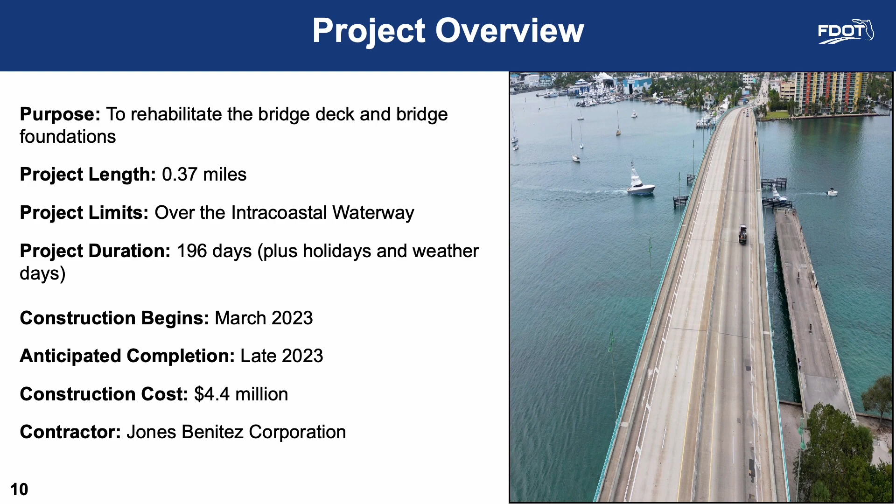Project Overview. Repairs will be made to the Blue Heron Boulevard Bridge over the Intracoastal Waterway. The project will begin in March 2023 and is anticipated to be completed in late 2023. The contractor building the project is Jones Benitez Corporation. The estimated cost of the project is $4.4 million.

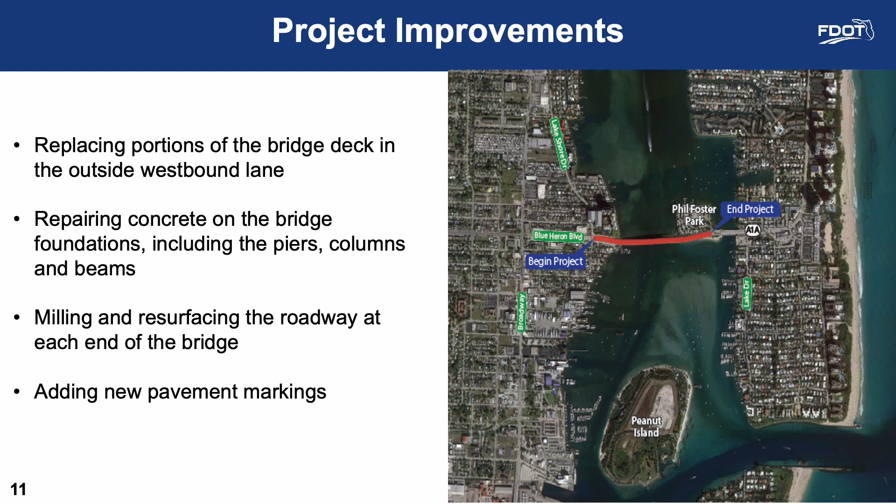Project Improvements. Project improvements consist of replacing portions of the bridge deck in the outside westbound lane, repairing concrete on the bridge foundations, including the piers, columns, and beams, painting concrete portions of the bridge, milling and resurfacing the roadway at each end of the bridge, and adding new pavement markings.

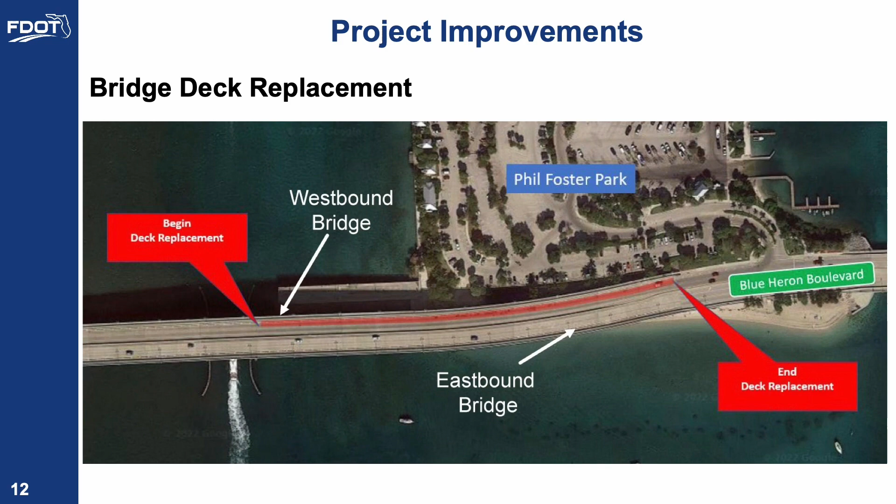The bridge deck replacement will occur between spans 10 through 19. During demolition of the existing bridge deck, a containment system will be put in place to prevent debris from falling into the waterway or beach areas.

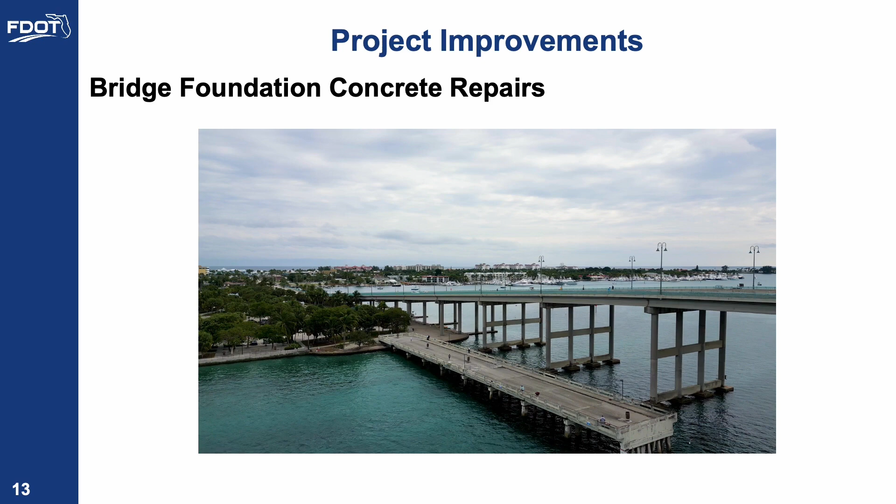Concrete repairs include fixing spalls and cracks in the bridge's foundations. Concrete restoration will occur at various locations.

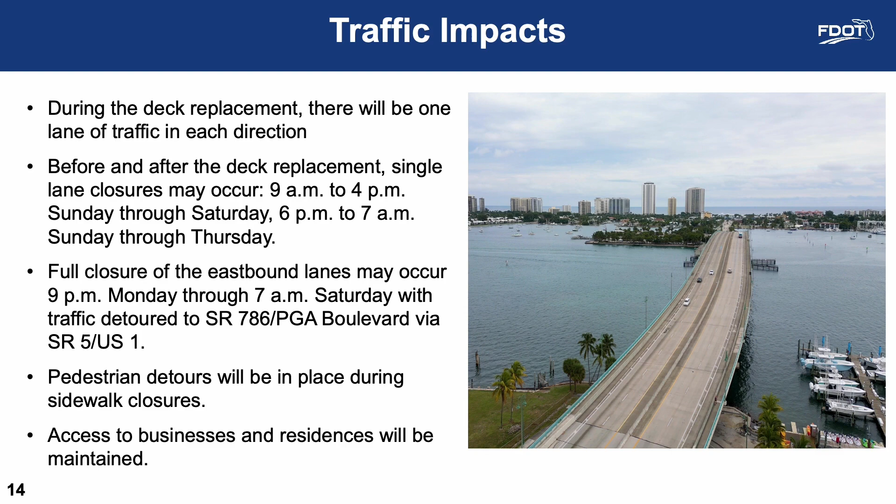Full closures of the eastbound lanes may occur 9 p.m. Monday through 7 a.m. Saturday, with traffic detoured to PGA Boulevard via US 1. Westbound and eastbound lanes will not be closed simultaneously. Pedestrian detours will be in place during sidewalk closures. Access to adjacent properties will be maintained.

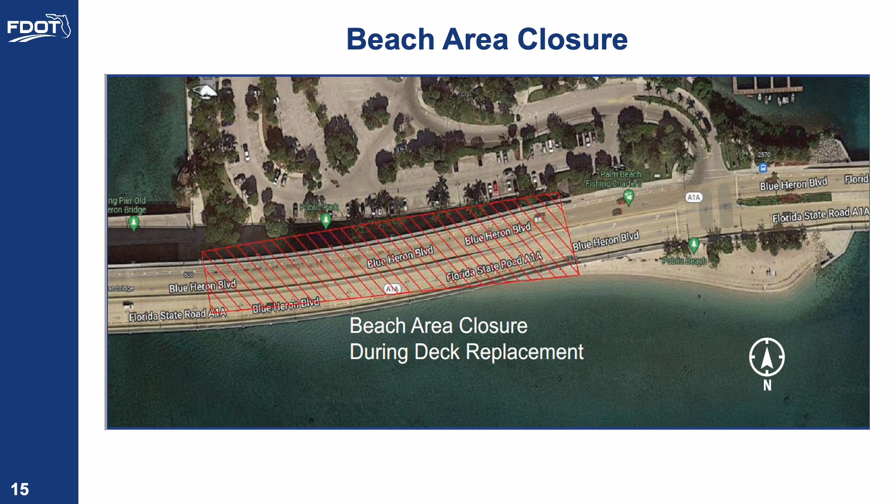Slide 15. Beach closure. Phil Foster Park will remain open. However, the beach area under the bridge will be closed during the deck replacement. The beach south of Blue Heron Boulevard will remain accessible to the public.

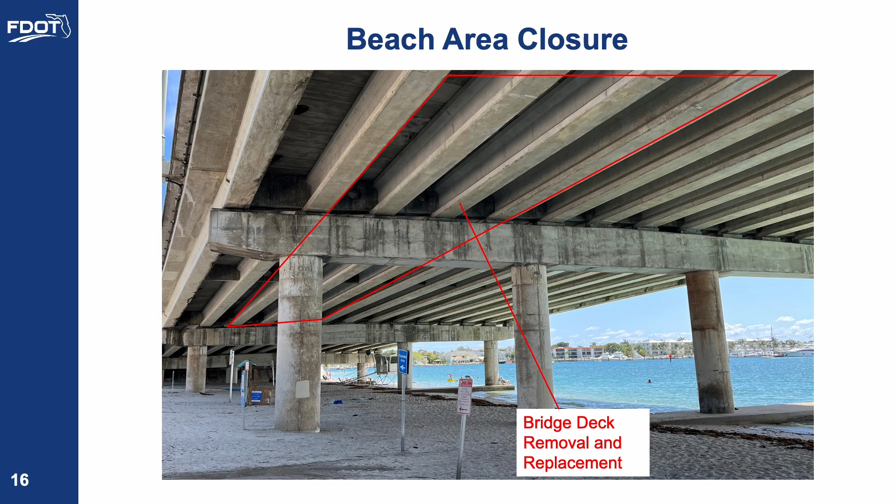Advance notice will be provided of lane closures. Work zone signs will be placed east and west of the work zone. Marine traffic will be maintained. Construction activities will not impact the boat ramp, docks, or fishing pier at Phil Foster Park.

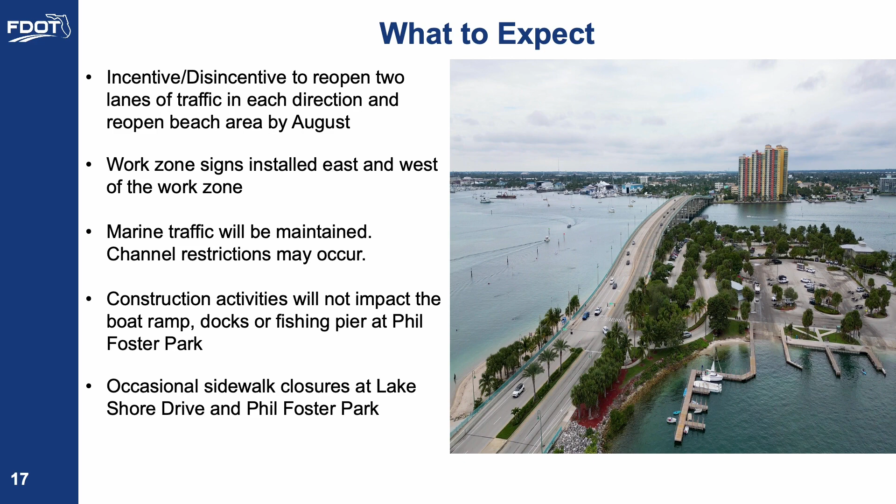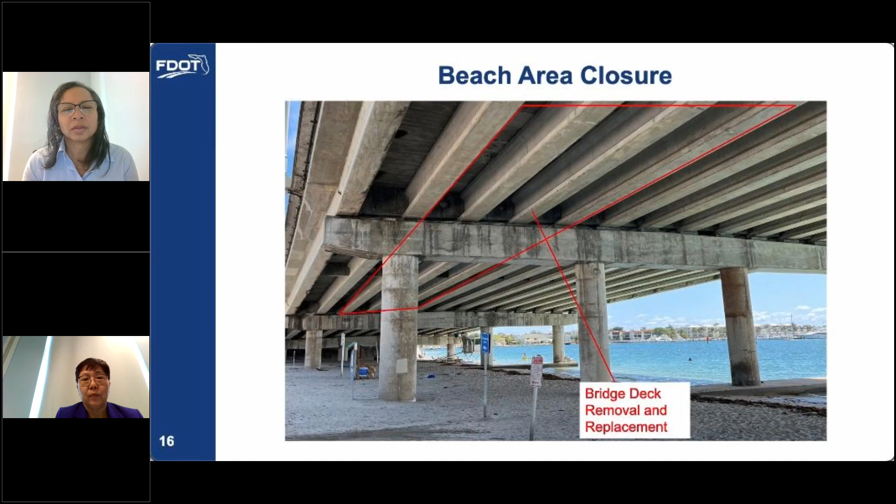Yeah, if you look at this, go back one more, Chuck. There you go, right there. Yes, that basically covers all the beach area underneath the bridge. The deck will have demolition activity, so it's really not safe for any pedestrian or divers underneath that bridge.

That's perfect, thank you, Bing. Melissa Johnson, she did have a follow-up question. She asked, will the pedestrian crossing times be extended at the park entrance stoplight to give people more time to cross the street? That's a very good question.

Al, can you address that please? Right now we are going to be reaching out to Palm Beach County traffic operations individuals and see if we can work on getting that crossing time extended. That's something that's beyond the control of the DOT, but in a partnering spirit, we'll be reaching out to try and get that accomplished and see if we can make a compromise and get it extended.

Perfect, thank you for that Al, that's a good response. Next question we have here is from Joseph, and he's asking, our concern is the negative eco impact and reducing the trash impact. I understand the catch nets, but will there be extra waste containers for debris and for workers' trash? Also, whom can we contact to help with any trash concerns, whether providing extra trash bins or times of general cleanup? Thank you.

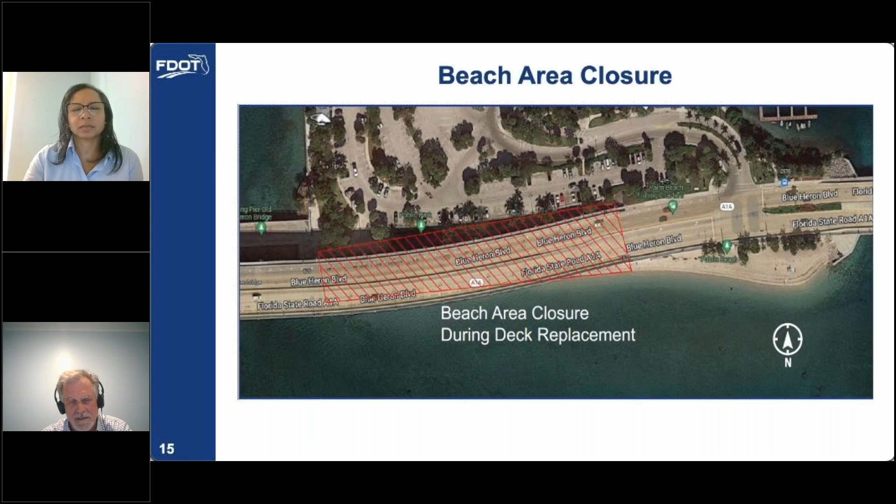You can see the fishing pier on the screen. It's raised up, and there's a seawall there. So we didn't look at how you could modify that to get people in the water, but I'd have to go look. Right there, you can see there's no problem if divers want to sit on that seawall and jump in the water right there.

Oh, they still have to construct. Yeah, there's still going to be a barge there. There's going to be a turbidity barrier on the other side of that fishing pier that's going to wrap around all those columns you see in the water. So the divers would have to go to the inlet, almost the channel, and then go back east to the area where they like to dive. So we wouldn't recommend you doing that. I mean, it's open, that fishing pier will be open and that whole area will be open, but it's nothing that we would recommend you do.

One thing I'd like to add is that in the previous slide, the partial part of the deck replacement as it impacted the beach and that crosshatch area that was representing the beach closure. The work and restoration along the deck replacement actually extends out over the water and almost out to the fender system where the actual boating channel is. So as John pointed out, there's going to be a big barrier going around. Looking at the slides upside down, you're seeing there's actually 3 piers in the water there. There's going to be big barriers circling those barges out there that are going to be engaged in concrete restoration as well as coating of that substructure. So that's another reason why access coming off of either the seawall or that fishing pier would not be a very good idea.

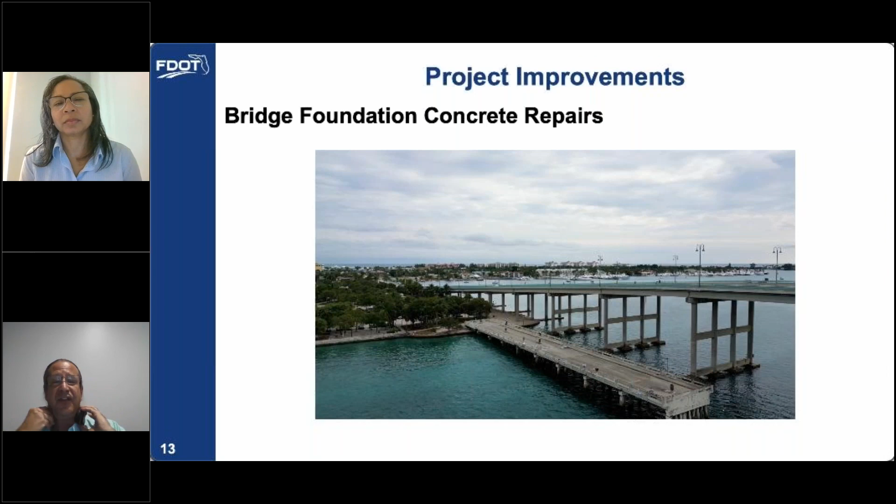In the water area, there's going to be a floating turbidity barrier, which is basically going to extend from the seawall west out to the pier just before the fender system, looping around, and it's going to come back to the seawall again. In there, we're going to have barges staged in order to do these construction activities. It might not be a good idea for divers to be trying to get through the area in the work zone at that point.

Is there any possibility of a diver entrance by where the boats launch? I said, is there any possibility of making a temporary entrance over by where the boats launch? There's dockage that could contain the divers on one side and the boats on the other. I'm just looking for a way not to go under that bridge and not to go over the road.

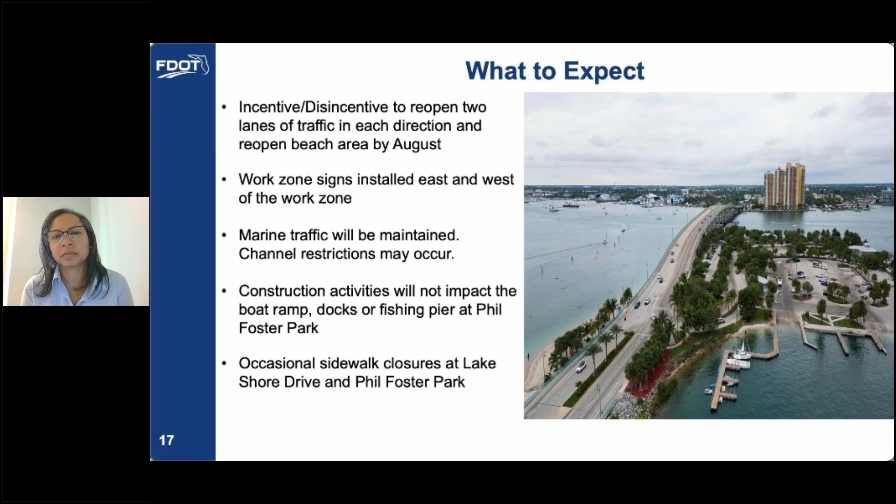So I know there's changes, there's work being done, but my dives would be impacted and I just wouldn't really dive if it meant going over the bridge, walking across the street, or walking much further. And sometimes those handicapped spots are even occupied, so I don't even get as close to the water as I'd like. I just wanted to voice my concern, that it would impact me and my interest in diving at the bridge when visiting from up north.

Thank you for that, Jeffrey. Thank you for providing that input and feedback. We appreciate it.